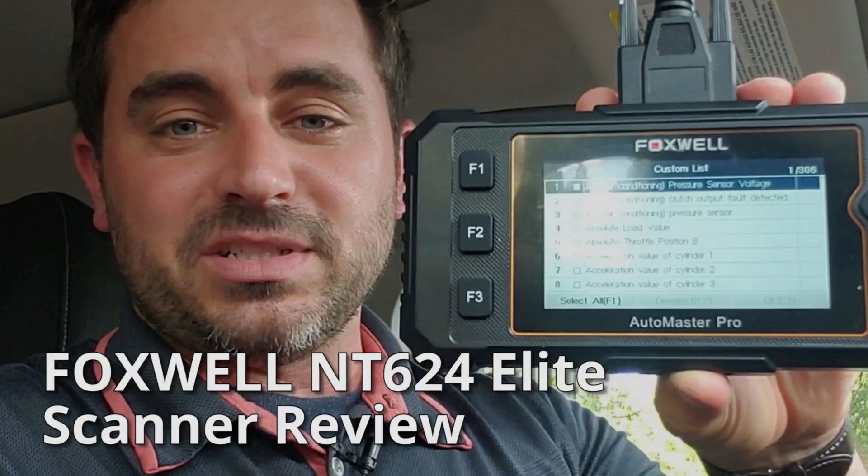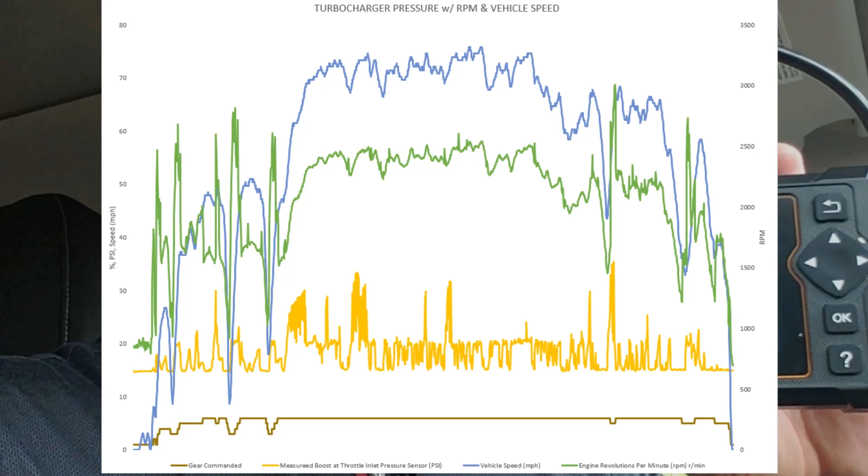Today we're going to be reviewing the Foxwell NT624 scanner. It can read codes and clear codes just like you'd want in a scanner, but what's really awesome is that it can detect all the modules on your car, and you can get in and look at live data and record live data. You can graph live data for all of the data that streams through your vehicle's computer system. You can print it out, bring it into a shop and say, this is what I'm seeing, can you help me? Or you can do the diagnosis yourself.

Now we're going to get into some detail with this review. We're going to start with unboxing and getting started, then get into the Foxwell software called FoxAssist. We'll walk through the home screen and the maintenance reset on the scanner, as well as the AutoVin feature to look up your specific control modules. We're going to look at live data monitoring, how to save that data, import it into Excel, and create a data chart, and then at the end I'll tell you what you need to know and the caveats when considering this scanner, as well as the final review.

Let's get started. In terms of what's in here, you get a nice carrying case, some cord storage that zips up, a little stretchy basket, as well as space for the scanner, your serial port and OBD2 adapter cable. You have a USB to mini USB plug to connect the scanner into your computer, and then a USB stick to micro SD card, which is what I prefer to use for data transfer once you start recording things.

It's a really stout block of a product. It has the serial port output on the top where you plug in your OBD2 cord. It has a removable micro SD card as well as the USB mini slot on the bottom. It has really thick, chunky rubber buttons with good tactile feedback, and a nice big screen that you can wipe off easily. It's not an LCD that you have to be really sensitive about.

On the back you have these really nice finger pockets that I've actually come to appreciate, because when I've been holding this single-handedly, I can still get my fingers in here and navigate all of these buttons with one hand. I can do the same on this side. So, pretty stout little product.

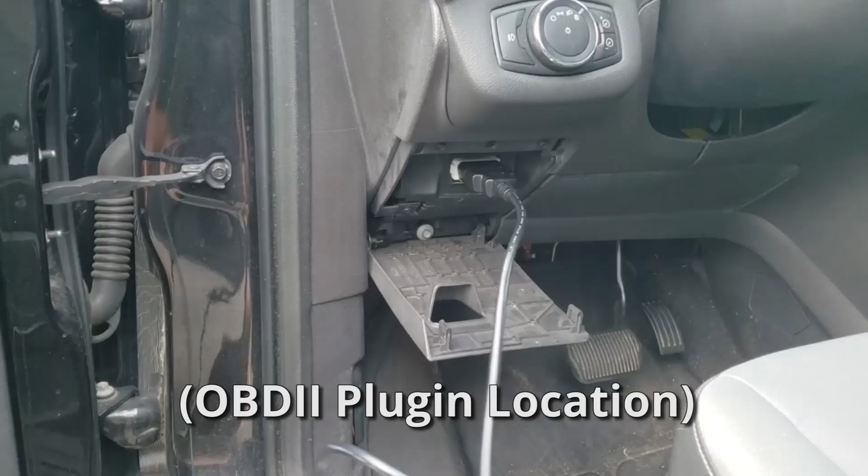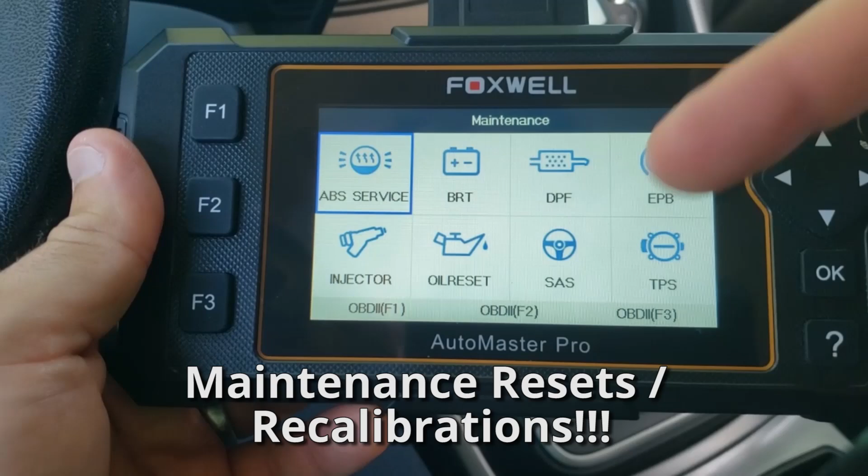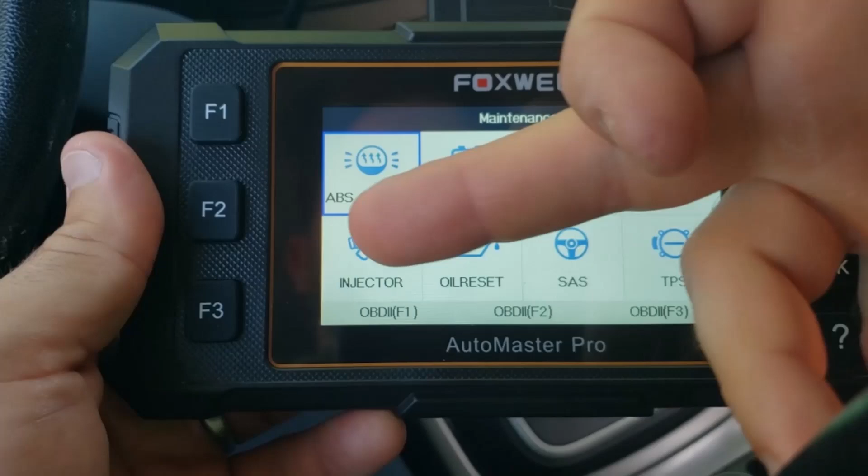This can scan engine codes, look up trouble codes, and erase engine codes. What you can also do is AutoVin, which will search the VIN of your car. It can do any car from 1996 up until present day. Anything with an OBD2, it can tap into the live data feeds of all the different modules and pull real-time data. It can also give you shortcuts to recalibrating regular maintenance items for your car, such as your ABS cylinders, your BMS for your battery, diesel particulate filter, electronic parking brake retraction for the cylinder and electronics so you don't damage it when replacing brakes, your injector system recalibration if you replace your injectors, regular oil life reset, steering angle sensor, and throttle position sensor. There are lots of different recalibrations you can do here, all from this scanner instead of the secret combos of buttons and switches to press with Ford.

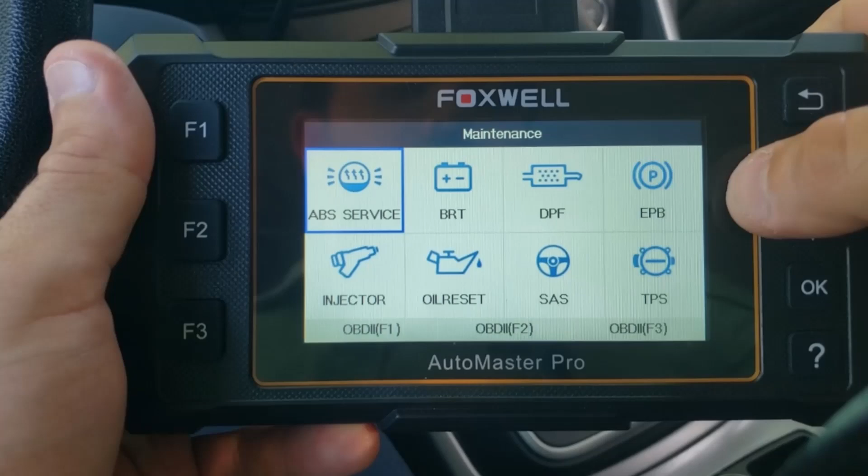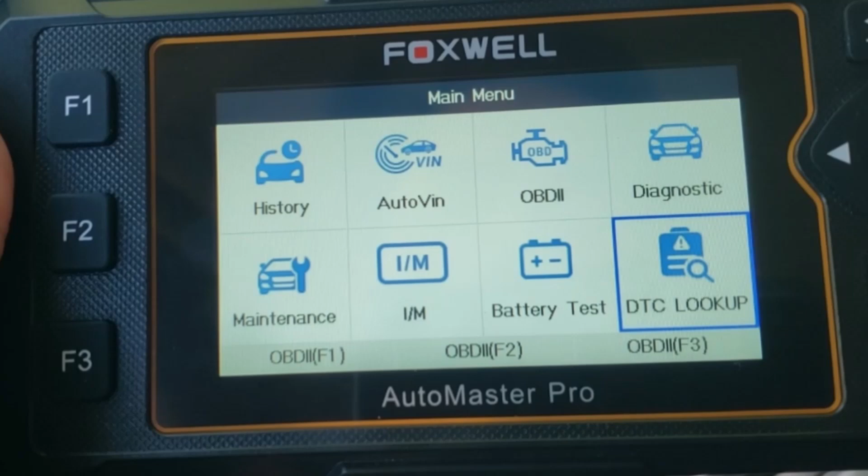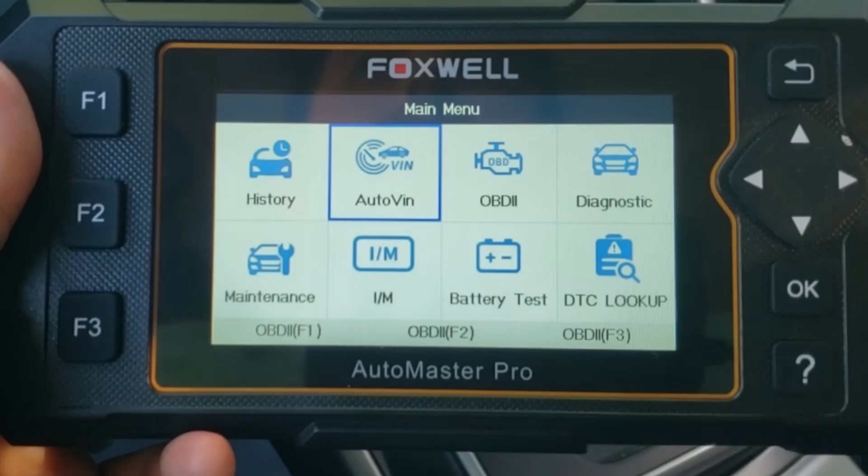On top of that, you can look at emissions related information. You can check your battery voltage, whether the car is on or off, and see real-time data of your battery voltage. Right now my vehicle's on with the alternator on, idling right around 14 volts. You can look up trouble codes just by toggling the numbers here, and of course you can go in and change settings, view your saved data, and apply software updates as well. What you can also see is data based on what you're experiencing while driving.

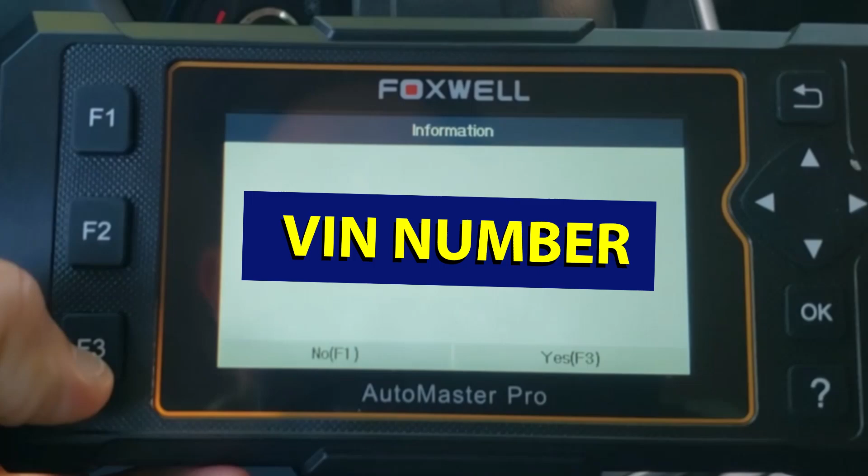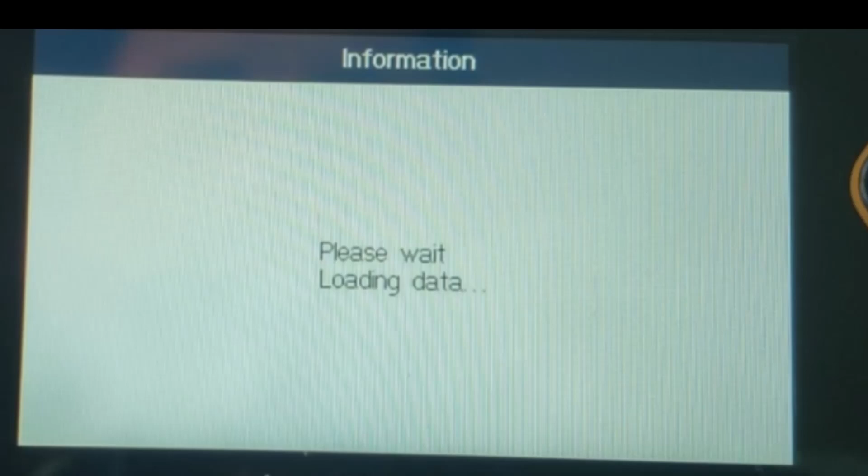So you can go to diagnostics and sort your way through, or go quickly to AutoVin. It says automatic VIN acquisition, and it'll pull up your VIN. Say yes - these are your selectors over here, so no for F1, yes for F3. I'm going to press yes, say America, Ford. And then this is the information for my Escape. I'm going to say yes, and now I'm going to do a quick scan, and it's going to go through all the modules in the car. Oh, got a fault for body control module - we'll come back and see what that is.

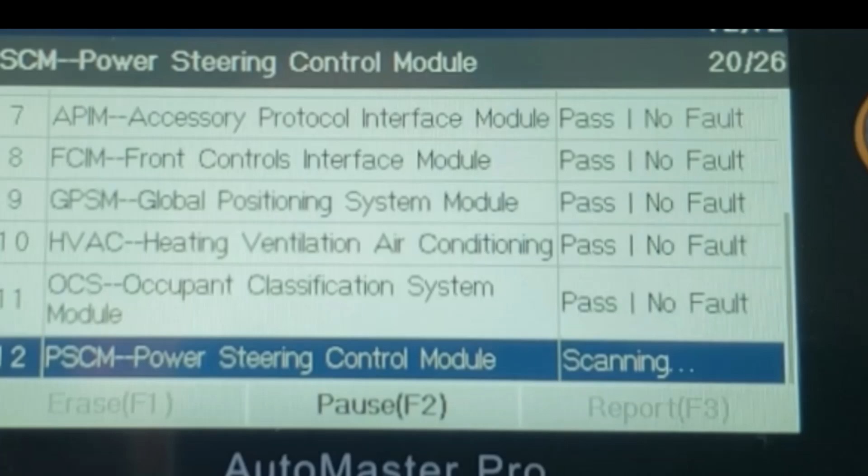There are 26 modules up here that it looked for. I'm going to look at the body control module, go down to read codes, switch to on, and make sure the engine's off.

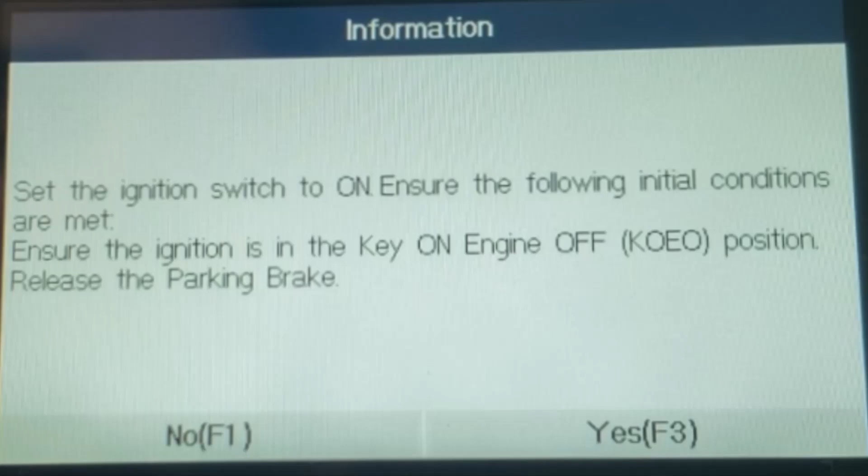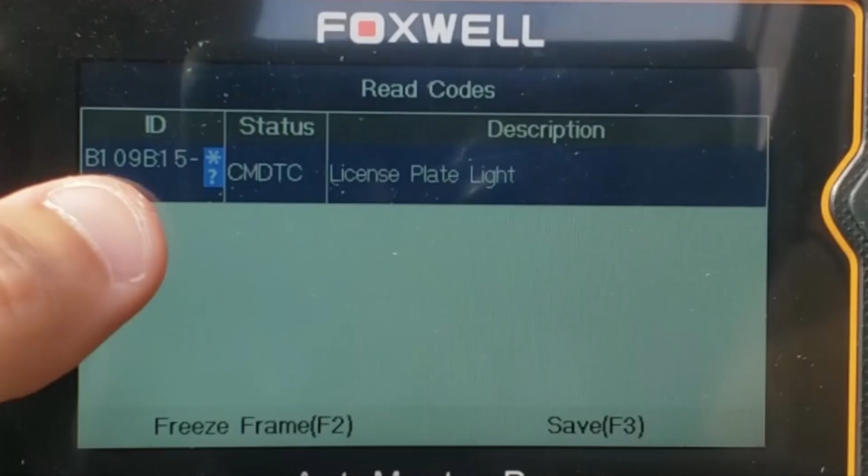Oh look, one of my license plate lights is out. You can see how I went about that and found it. It wasn't a check engine light necessarily, it wasn't on my dash, but it pointed out to me that...

My license plate light was out. Now say that I replaced it, I would go down to clear codes, set the ignition switch to on, press F3 for yes, clearing, and the codes are cleared.

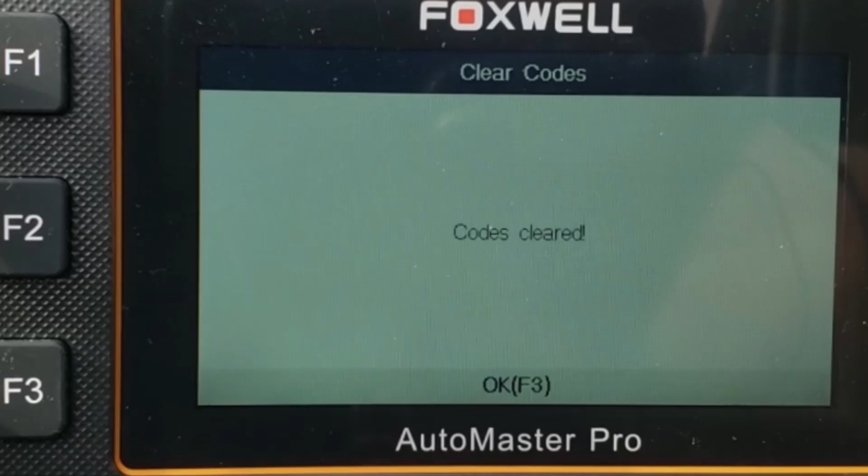Done. So what we just showed is that you can take this scanner and look into the different modules of the vehicle and scan each module to see if there's something wrong that normally wouldn't show up on the outside if you're just sitting in a car and checking it out.

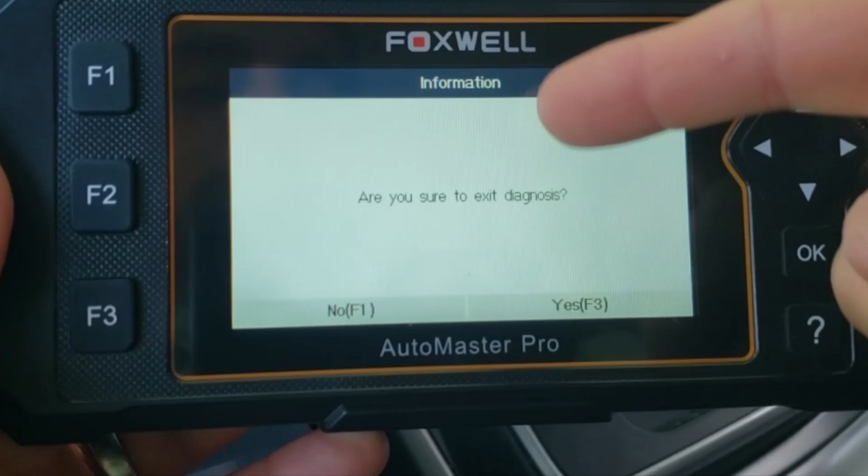This also would be very helpful if you're looking for a used vehicle and you go to check it out and the guy says there's no check engine codes. Well, you can plug this in and see really what's going on under the surface.

Very cool. So now I'm going to show you how this thing can go in and pull live data, and it is insane.

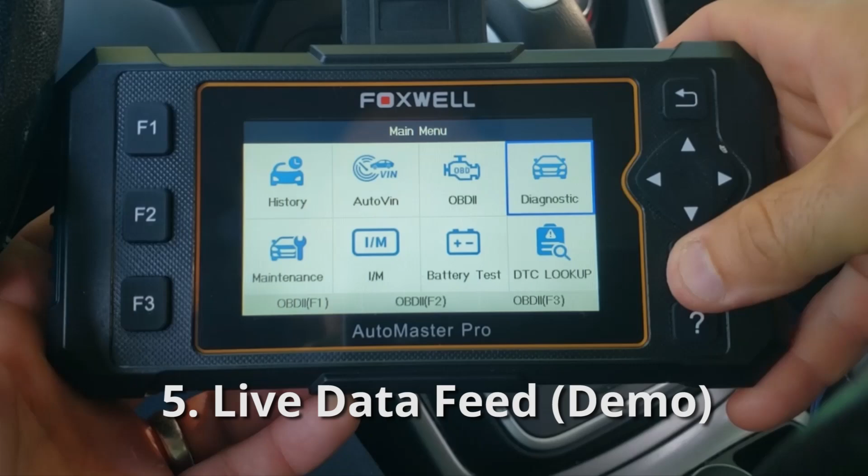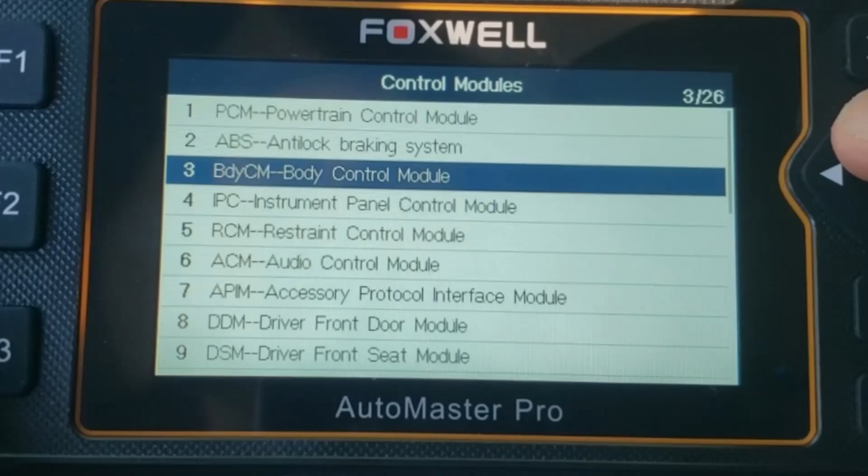We're going to go to control modules now instead of quick scan, and now we can look at each of the control modules in the vehicle and see real-time data. We're going to go down to live data here.

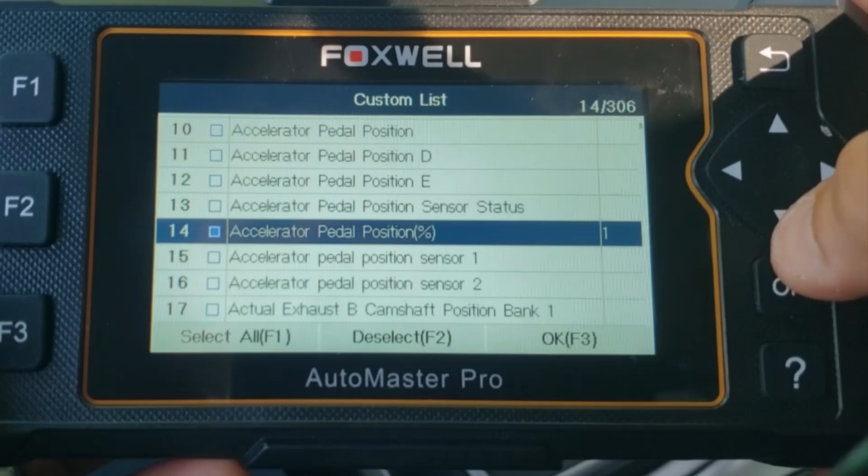Once that's loaded up, you can now look at every parameter that the powertrain control module sees. I can scroll up and down with these arrows one at a time, and it's kind of painful, so what you can do is press side to side and you'll skip a set.

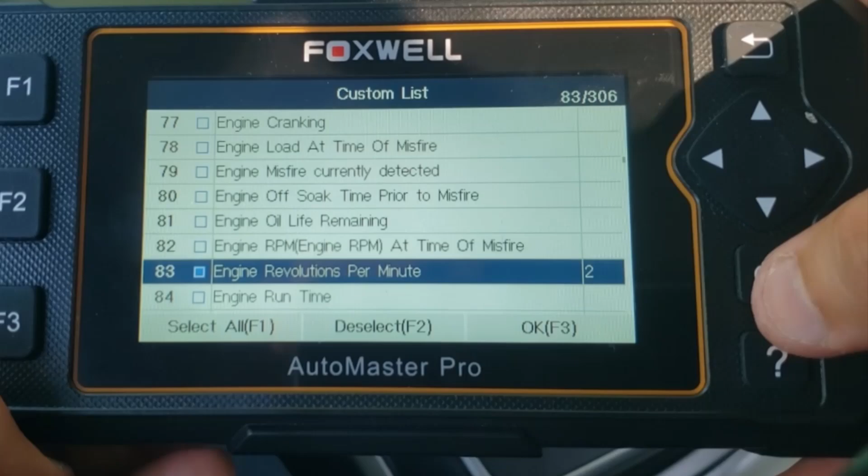And I can find my RPM here. I'm just going to show you what you can do. I'm going to press OK. And so now you can see my RPM here, and you can see my throttle position of the pedal here.

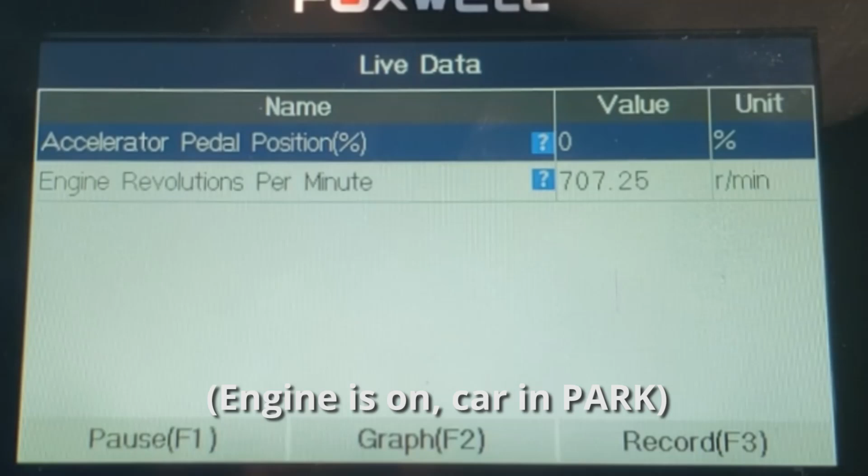Now watch, I can show you, it can respond in real time. As I press the gas, you'll see the percent of the throttle being pressed change and the RPM go up.

Now what's also cool is you can do graph, you can see this in real time. And this is just a simple example, you can chart all sorts of stuff on here.

The graph can show, you can do one graph at a time, or you can do multi-graph by pressing F2, and it'll show two charts here. So it's hovering around my RPM here. Again, my position for throttle is 0 until I hit the gas.

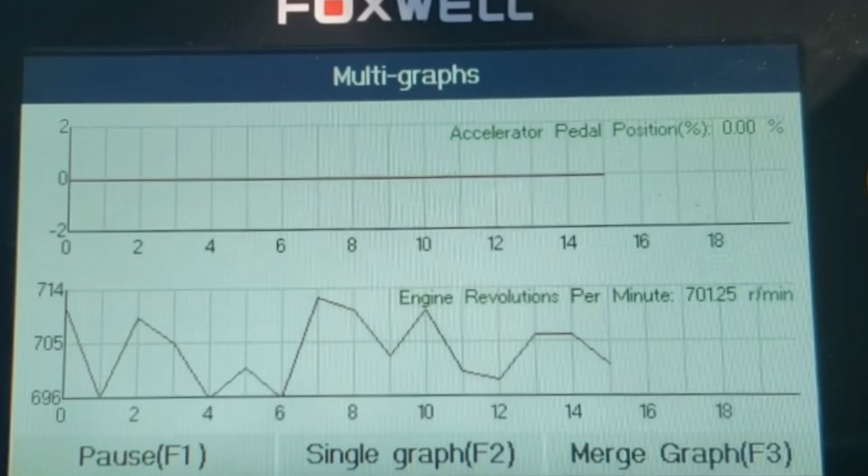The data shows and tracks in real time. But then you can put it on top of each other, you can merge the graphs, and that is really cool.

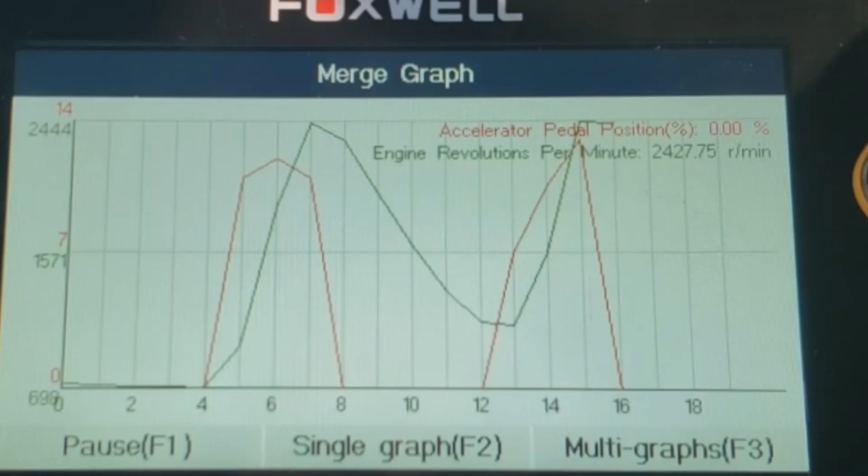Now this is just viewing in real time, this isn't saving, this is just monitoring. So if I want to save it on the SD card and push it out to Excel, I go back and I press record now.

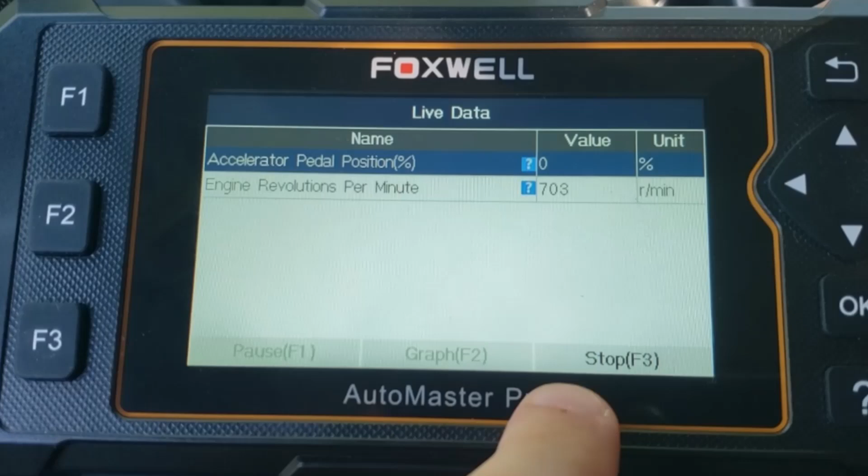And now when you press record, you can't see it in a graph, but you can see each of these times it changes, it's saving a value.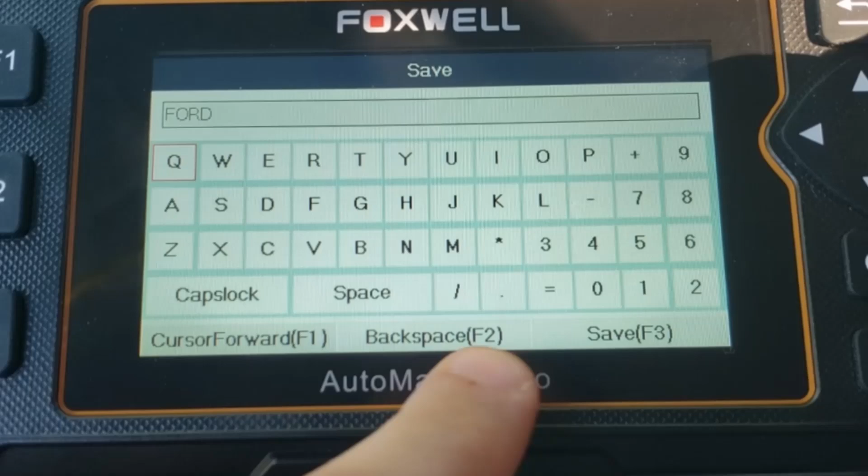And then when I stop it, I press F3, it's going to tell me to save it. I go down to the keyboard and I can go through the keyboard here and save it. I'm going to call it Ford RPM, and then I'm going to press F3 to save it.

So now that data run that we just did is saved on the SD card. Now that was very short, so that chart's not going to look like much, but I'm going to show you a really cool chart that I pulled up after driving home one day and testing out the RPM versus the gear shifting. Let's get to that right now.

Now to get out the micro SD card, you press it down once and it spits it out, and then you reach in and you remove it. Then you take your USB adapter.

Now we're in the data management part of the FoxAssist software. It makes it really nice to be able to push out a filtered CSV file for Excel. I'm going to take this file that I've checked with the orange box here, and I'm going to click Report.

So it's going to show these data fields that I recorded, it's going to do these three here and show you how it exports. I'm going to click Confirm, but I'm going to click this button down here and click Export to CSV.

I'm going to go to the desktop, open Demo Video, and click Open. Then I'm going to open Excel, Demo Video.

So now if you've ever imported a CSV into Excel, you're going to get this, and it's asking Excel how to sort through the rows of text data to better organize it into columns and rows within the software. You can see the preview down here where the cursor is, showing the names: actual output shaft speed, engine RPM, and gear commanded.

So I'm going to go Next. Tell the software what to look for to know where to separate the values, so I'm going to click comma. Now you can see down here that the rows are organized into very clean values.

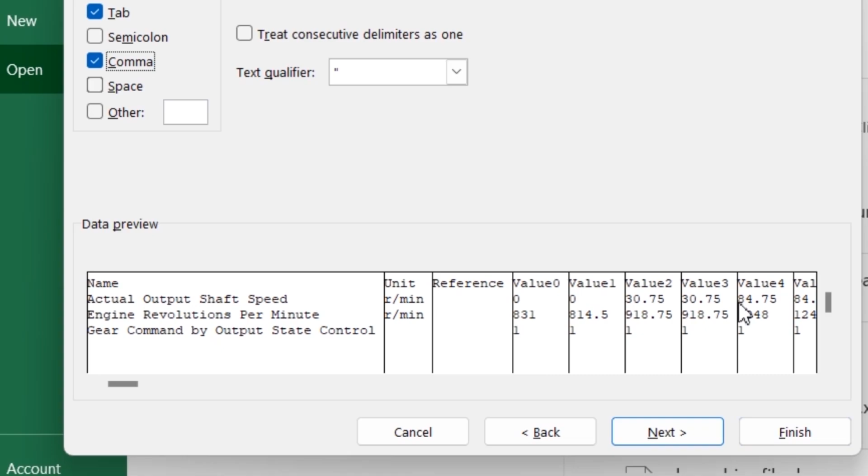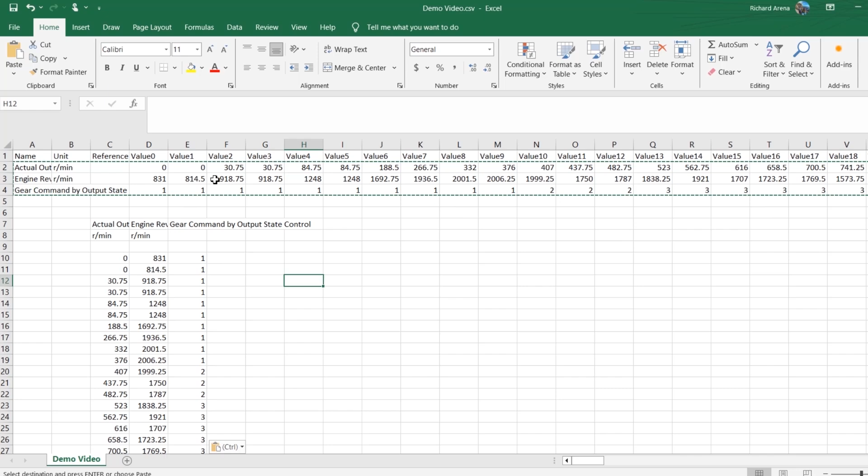All right, now we're here, and I'm going to highlight these. I'm going to Control-C and copy them, and then right here I'm going to paste, but paste transpose, which gives me my columns. I'm going to create an x-axis for these columns to run down.

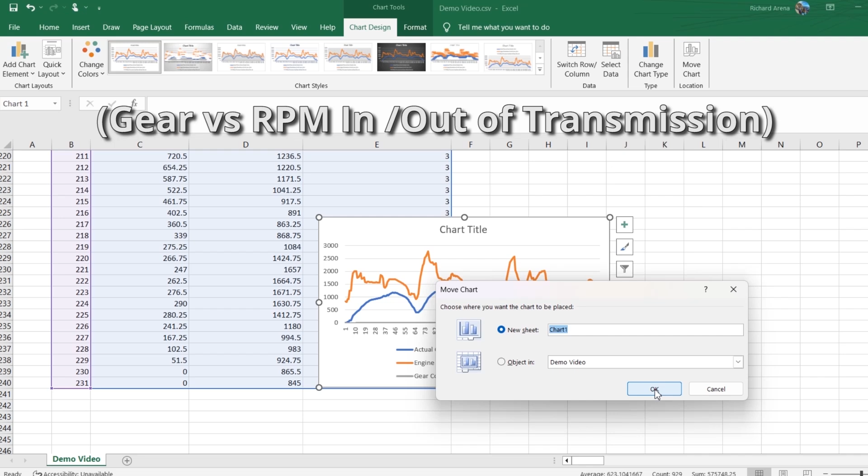Then I go to Insert, click the chart, and here we have a sweet chart. I'm going to move it to a new sheet. This is so cool. Now, what you're looking at with the blue and the orange is the shaft speed going into the transmission from the engine.

The blue is the shaft speed coming out, which is why they follow the same trends. Right now, this is all on the same axis, so when you have gear speeds that are 1 through 6, but RPM that go up to 3,000, you add a secondary axis.

Now, this is where it gets really cool. The trend for the gray is the gear shift: first gear, second gear, third gear, fourth gear. I only got up to fourth gear when I was doing this test recording.

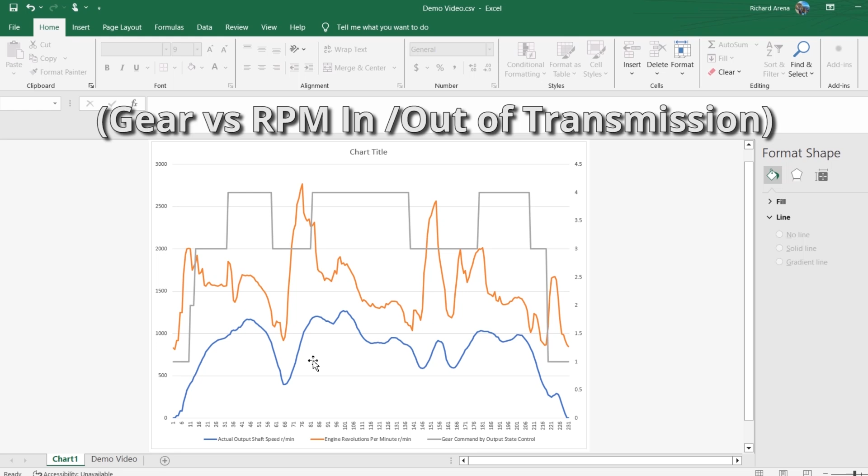You can see where the gear shift happens and where the trend of the orange changes relative to the blue. So it's really, really fascinating.

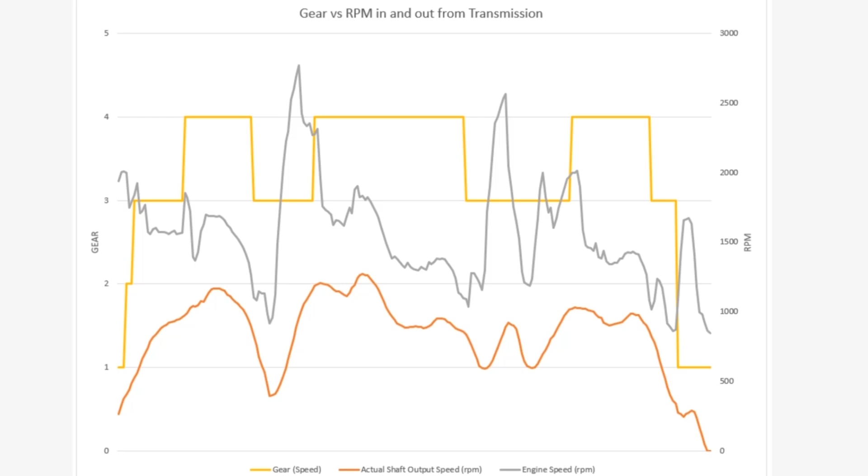You now have proof that something is happening. You can bring it to a shop where they say if they can't reproduce the issue, you can say, well, this is what I'm seeing. You can make a really nice clean chart with the data exported from this scanner, and I think that that is fantastic.

So even though there are many reasons to sing praises for this scanner, I do want to reiterate that there is a learning curve to it to use it well. First off, remember that this scanner is not going to solve your problems for you. This is a tool to look deeper into your car, but you still got to think and do the detective work.

It'll tell you codes and faults that the computer already sees. Look at the trend to see what might not be working together right. You still got to put the pieces together, which I think is cool because you got to learn about your car. It's not an easy button.

Secondly, you got to be a little patient because it takes time to load all the data in those different modules. Just going through serial port and OBD2, it's not lightning fast. It's just hardwired tech, but it's good information.

If you do want to upgrade to a larger size card, I did confirm with tech support that it's possible, but you just have to transfer the formatting up to the next step of the card, and they can help you with that. Also, if you're going to be looking into this for data evaluation and you're going to use Excel, you got to know a little bit of how to use Excel.

Finally, there was one hiccup that I had that I'm still trying to better understand. I lost a data stream that I was recording one time because I thought I saved it after I entered the text for the file name in the scanner, but after I unplugged everything and went to import it into my computer, I didn't see the file name in the saved data folder.

But I would still recommend to wait a second after you press save before you back out of everything to make sure that the data actually saved on the unit.